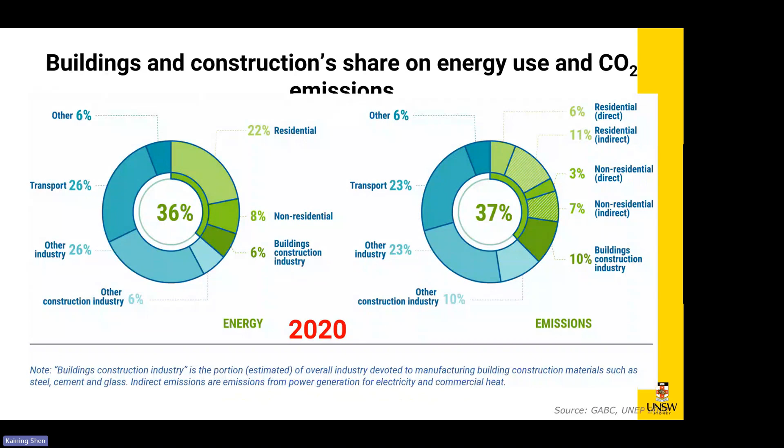I'll skip through a lot of these general things, because I had picked it up for a different type of audience. I haven't been reading emails recently, been struggling a bit. So just listening to the previous speakers gave me a better idea of what the day was about. So building on what Phil said, we've been doing some work together with Phil.

I'll come to the large project I led till 2020, which is the CRC, Cooperative Research Centre for Low Carbon Living, which was a $104 million large project, many projects within that, and I'll talk briefly about what we tried to achieve there. But one of those was a post-CRC project, which finished and got published beginning of this year on net zero, our net zero focus work, looking at whole of building, whole of life thinking.

I deal with engineering and society groups, and I'm on the National Institute of Architects sustainability task force, looking at how they need to change behavior and focus. And they are beginning to think quite a lot about whole of building, whole of life. We thought we were trying to push it from the research side, but there is a huge appetite on the designer side. But they find that they don't have credible tools and consistent data sets to calculate on. So we are trying to put some of those together.

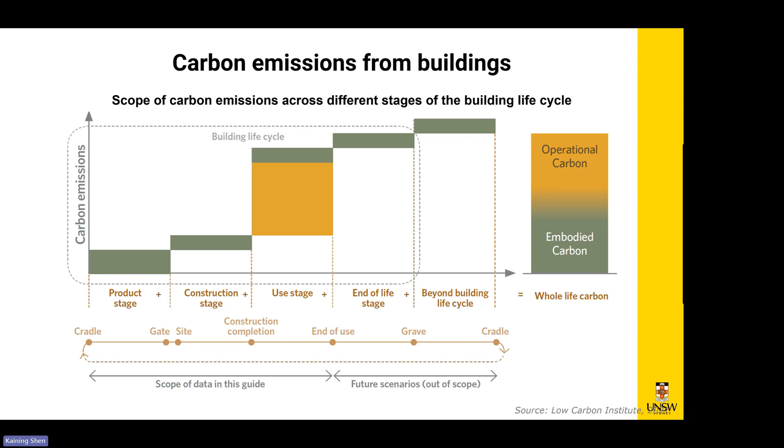Obviously, the embodied carbon, Phil is one of the big time experts in the country and talks about that. But within that, the operational and circular economy approaches, which is beyond life. How can you design for deconstruction, so that you can also link that with decarbonization, with reuse of materials being feasible, for example.

So we took an approach, another bit of work we did, looking at top-down and bottom-up approaches to net zero at building scale. The top-down being as the grid greens in Australia. I think we have quite a positive thing. 10 years ago, only about 8 or 9% of electricity in the grid was renewables. This year, it's about 35 to 40%. And by 2030, it should be about 75 to 80% renewables in the grid. For a country that's the world's largest exporter of coal, I think it's quite remarkable.

So if the grid is greening at the pace that it is, how can we attribute that to building energy usage? Because we are beginning to use a lot of green energy, the stuff you buy to heat, cool, and all of that. The calculations are changing, in other words, and how do we adjust to that?

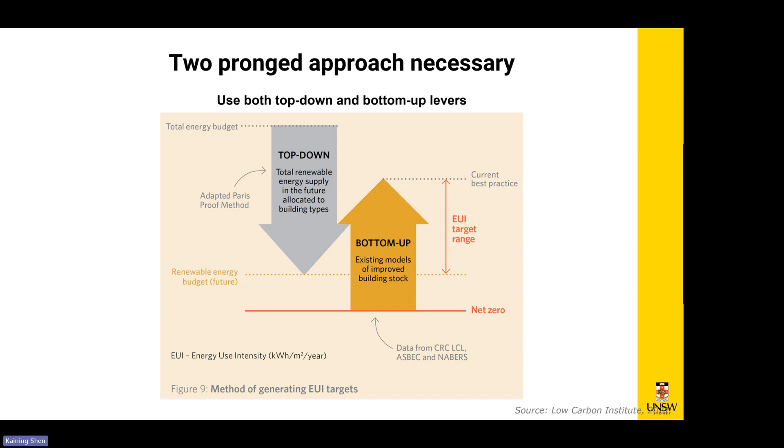The bottom-up is all of the things we do as designers, architects, engineers, in terms of minimizing demand through good design, and then a whole range of options that you can choose from: efficient HVAC systems and all the equipment, lighting, that we choose to make buildings more comfortable and workable, for better IEQ. So energy efficiency more broadly, how can we bring that down to the lowest possible target, so that we have less renewables required to offset and might take it to zero.

So a threefold approach. We were looking at energy efficiency through good design, what architects know and don't know and what they can do to deliver. Then integration on site, photovoltaics, for example. At residential level, we have about 3.5 million households with photovoltaics integrated in buildings. So that's bringing the demand down, and photovoltaics has become really good payback in Australia at the moment.

$3,500 gives you 6.5 kilowatts of PV on the roof. And for a 3 to 4 family house, you are getting very close to generating all the energy you need, for example. So things are changing, is what I'm basically picking up there.

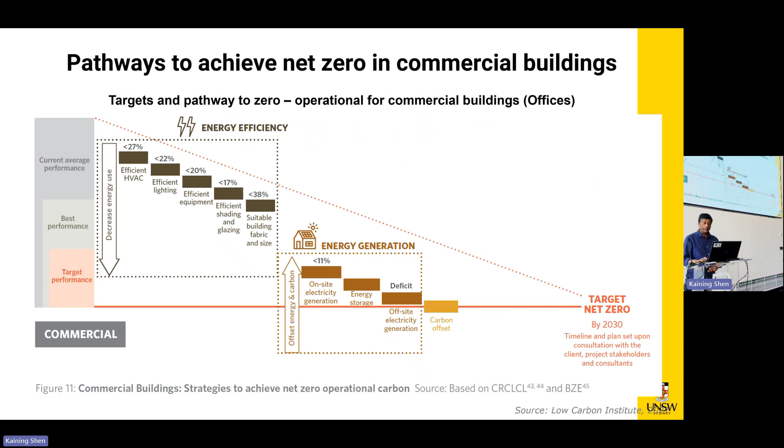And then we go to, if you still cannot do net zero today, you can go to offsite sourcing of renewables in your portfolio. Within the sourcing, for example, this campus that we're on has done its numbers and it can. The university has a solar farm out near the Victorian border, photovoltaics, and they are able to generate as much electricity as the total demand over a 24-hour period on campus here.

So even though there is no generation at night time, the base load is about 3 megawatts or so, but we're trying to offset using renewables that we contributed to in terms of a solar farm as a campus. So some of those things are beginning to make a dent in the national electricity grid, as well as the demand side in terms of how we design and use our buildings.

So we did a lot of assessments of how we can achieve net zero buildings in Australia for different climates, because we spread from really south in Tasmania to Darwin, a broad range of heating and cooling dominated climates. So we found that by 2021 we had all the benchmarks done, which we largely do. By 2025, all the necessary standards are in place for measurement and tools. And by 2030, for all new buildings, we should be able to achieve net zero carbon.

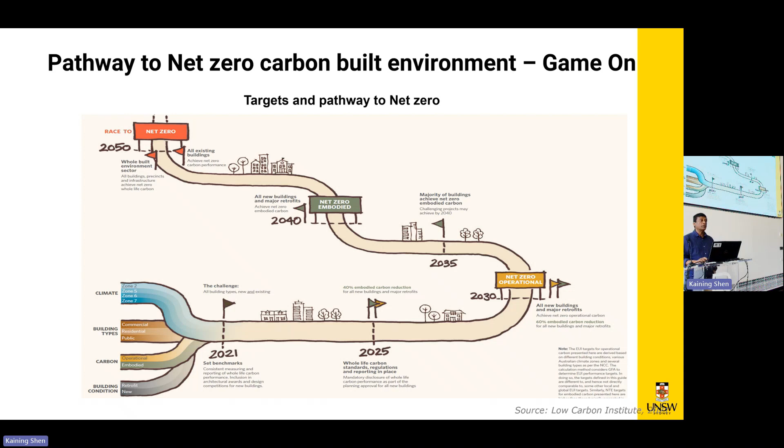But by 2040, we aim, and our research shows, that we can achieve net zero ahead of 2050. In other words, a large part of the total building assets can be driven towards net zero. So this sort of work that Phil and Land and others are involved with is trying to provide governments with direct evidence in terms of what is possible, so they can frame their legislation in that way.

Another project we are embarking on at the moment, Phil and Land, we're trying to look beyond just decarbonization work at this whole business of circularity, trying to get architects more in tune with designing not just for the life of the building, but thinking of deconstruction and reuse at the early stages, and looking at resilience, because through climate change in particular we are beginning to get a whole bunch of issues in terms of big floods and big fires and a lot of urban heat issues that are being talked about.

So trying to see to what extent through good design and planning we can deal with these, working with councils and in particular the Institute of Architects and so forth. So at the moment, only about 7 or 8% of materials, what you call our designs, are done with that view to reuse and all of that, but there's a long way to go. I'll skip through some of those.

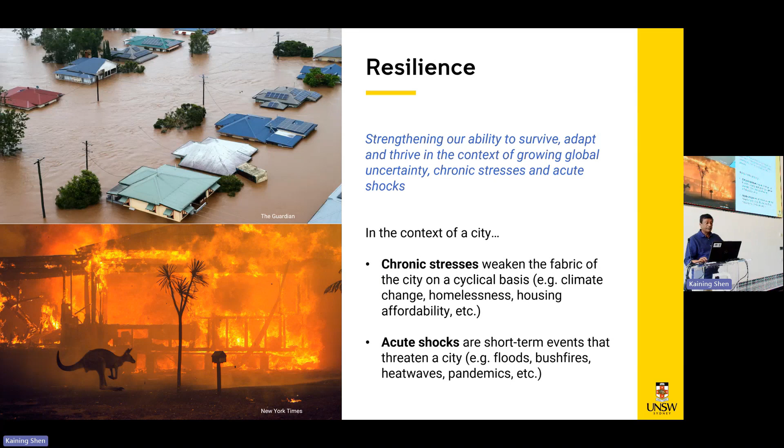Resilience, obviously, there's a big need, and this particular town was designed with a 1,000-year flood next to a river, and it hadn't flooded for a few hundred years, but it did, and now they're moving the town, for example. So the cost of some of those things is really huge, as we know, and globally, the cost of dealing with the problems afterwards is way bigger than the preventive work.

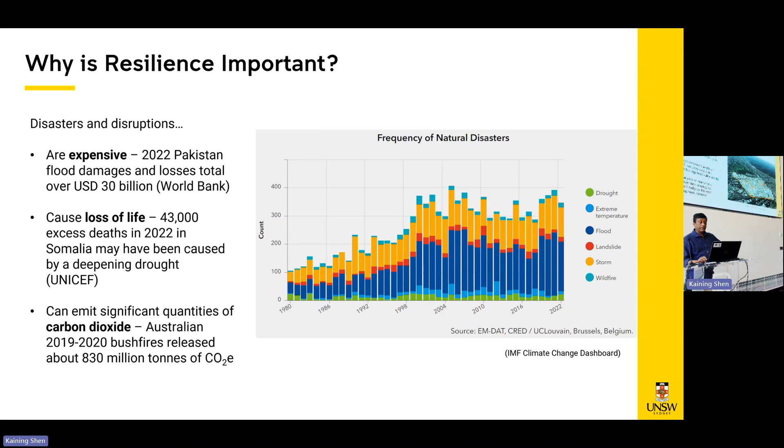You'll hear a lot about the urban heat issues, but at the same time, building resilience through power supply. We have done in my CRC a lot of work looking at resilience from the point of view of decentralized generation, using renewables in urban areas and so forth, so that there is not only a high level of reliance on our grid. The whole idea behind this project was to look at a local community, a precinct level development, and to what extent we can generate electricity for individual households, storage, and then at a community level, about 100 households, so they can use their own or buy off each other, and then as a last option, buy from the grid.

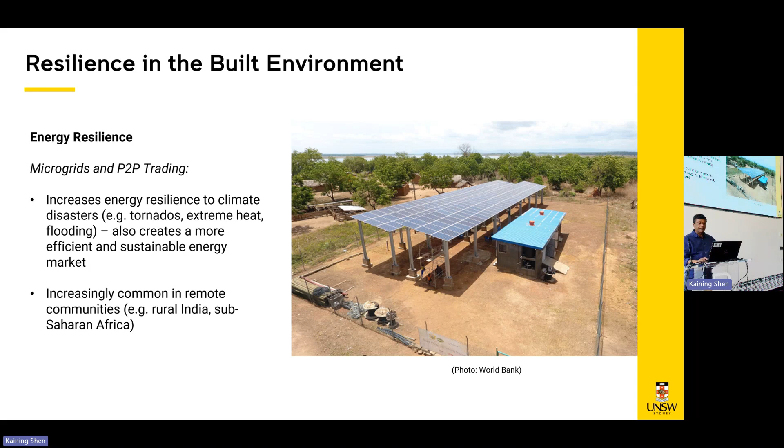So that led to the development of an app, for example, which is blockchain linked, and it does peer-to-peer trading, as they say. It allows you to trade off each other's storage and make grid purchase the last option, thereby giving higher levels of resilience. And that particular app has been developed to a point it's in use in about 5 countries now. At precinct level development, they're trying to use it to make sure they can get a high level of renewable energy into the system.

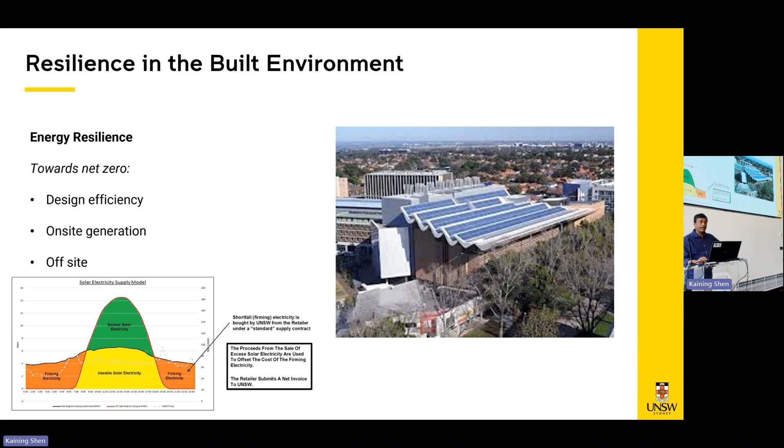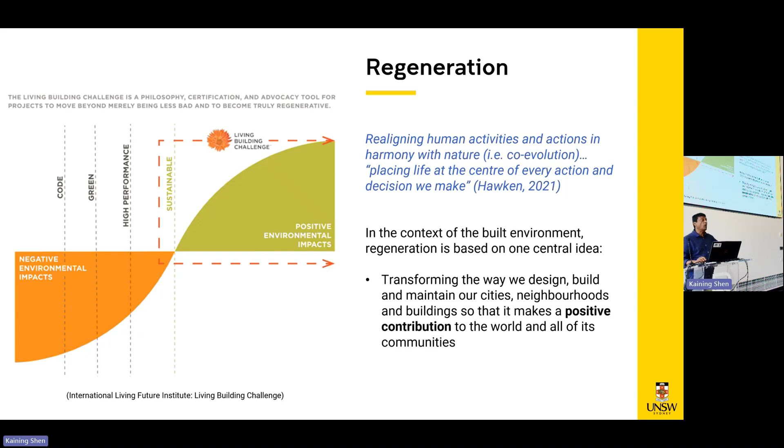Other work we are doing is looking at this whole notion of doing less harm and more good type thinking. So more regenerative thinking or positive development, as they say. This comes from Institute of Architects people, the architects trying to go beyond what's being talked about in codes and so forth. And they're asking us to look at how we can move more quickly towards nature positive solution sets, as opposed to just reducing the harm we are doing by energy efficiency and all of that. So it's more ambitious in that sense. And there are buildings around the place trying to achieve that. A lot of work being done in Singapore and so forth.

And we actually started the work on the trajectory for the building code, which is the main lever. So we did the base work, the technical and business case for change to the building code that is much more net zero carbon focused, which is now beginning to happen. Phil mentioned the National Construction Code, which is trying to trend towards net zero by 2030, 2040 or so.

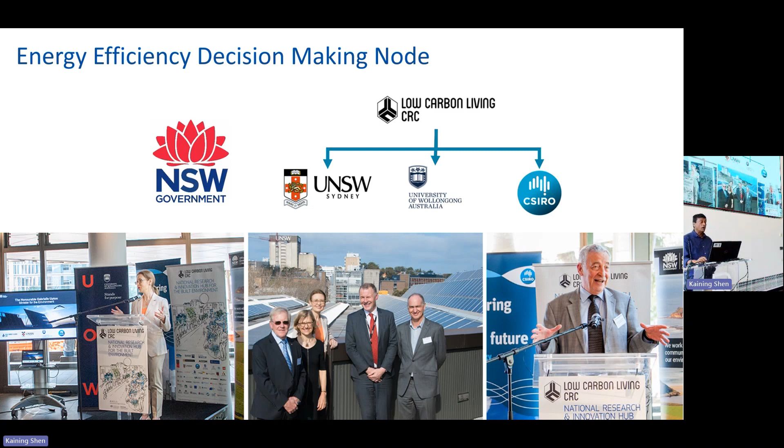We ran a decision-making tool, evidence creation tool for the New South Wales government for 5 years. When government wants to tackle a particular policy, they ask us to look at the evidence that supports that case, and we provide it, and then they take it through the process in parliament to regulations. A whole bunch of regulations came as a result of this particular initiative over a 5-year period.

Just to finish up, what I'm doing now, I'm running the New South Wales government's decarbonisation innovation hub, and it is trying to support. There are 9 universities that are members in New South Wales alone, and about 80 or so industry partners, and it is going to be pretty large. It's a 9-year program, more than 100 million Australian dollars overall.

It's trying to capture what we call TRL3, Technology Readiness Level 3, which is past proof of concept for green technologies, and trying to navigate those out to market in Australia. Australia has a very bad record of taking its own inventions and ideas to market in Australia. IP disappears, and next thing we are buying products based on that IP back in Australia. So the government has set this up so that we try and have local manufacture as much as possible of technologies and ideas by funding it.

But the reason also, there are a lot of failures in the research ecosystem in Australia. We don't have academics and researchers who take products past proof of concept. Beyond that, the funding gets very different. Early stages, Australian Research Council funding and similar is easier to deal with for researchers because they are familiar with that.